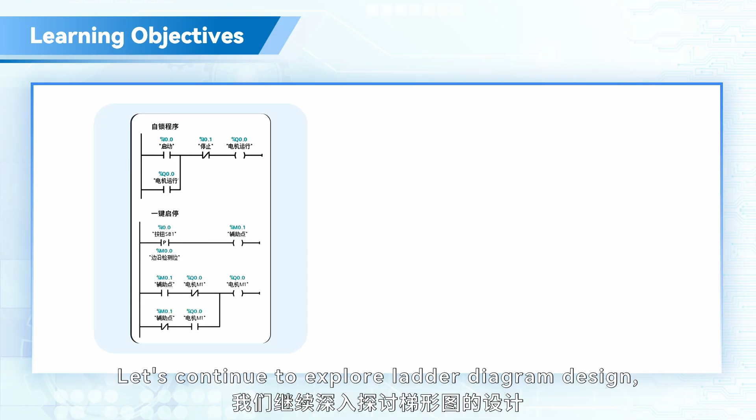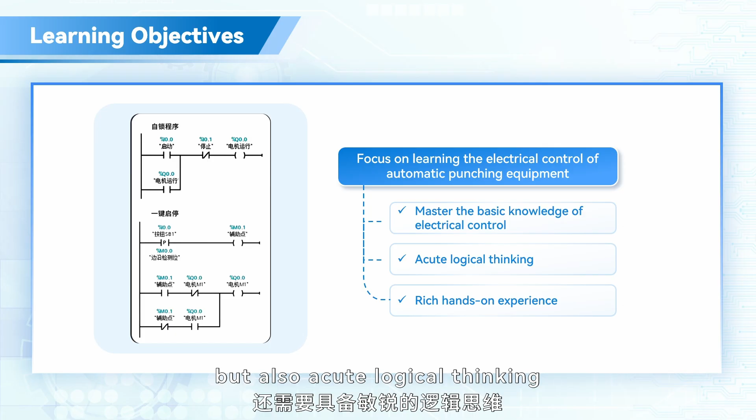Today we will study Chapter 3, PLC Program Controlled Punching on the Training Bench, Ladder Diagram Design, Part 2: Punching Process and Advanced Control. Let's continue to explore ladder diagram design, with a focus on the electrical control of automatic punching equipment. This is a highly practical and innovative task that requires not only a solid foundation in electrical control principles, but also acute logical thinking and rich hands-on experience. We will explore this topic from the following parts.

1. Initial setup and motion commands. Let's begin with Program Segment 14. When M5.0 equals 1, timer T37 is triggered with a 2-second delay. This provides essential preparation time for the subsequent actions. Next is Program Segment 15, which handles positioning for multiple punching points. When position flags such as M5.1, first hole, and M5.3, second hole, are set to 1, the main subprogram executes motion commands to move the punching mechanism to the corresponding positions. After the movement is completed, timer T38 is triggered with a 0.5-second delay to ensure mechanical stability.

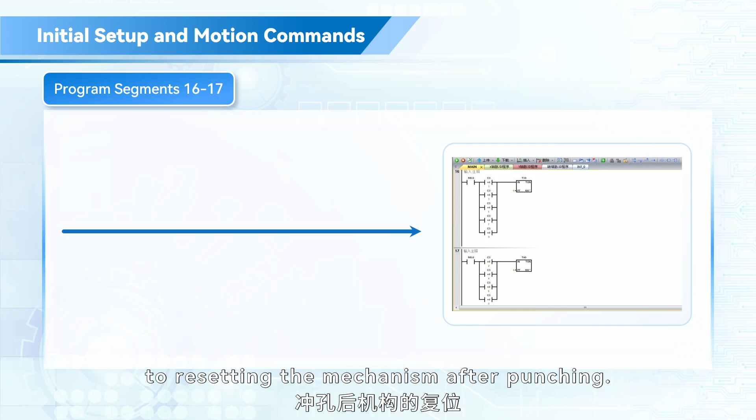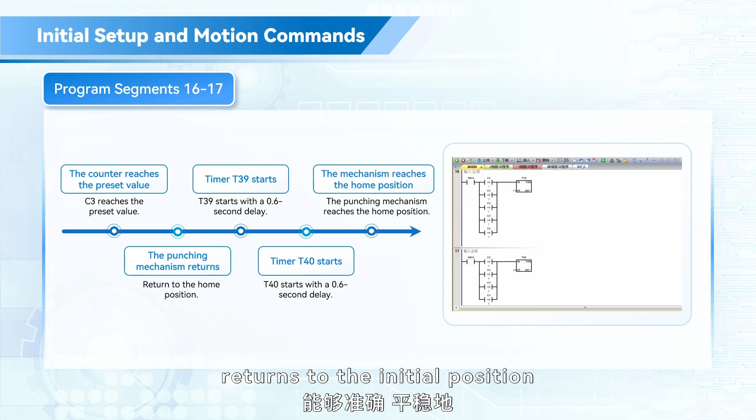In program segments 16 to 17, the focus shifts to resetting the mechanism after punching. When counter C3 reaches its preset value, the punching mechanism returns to the highest point, i.e., the home position of the AC motor. Here, timers T39 and T40 are used with a 0.6-second delay, respectively, to ensure the mechanism returns to the initial position accurately and smoothly.

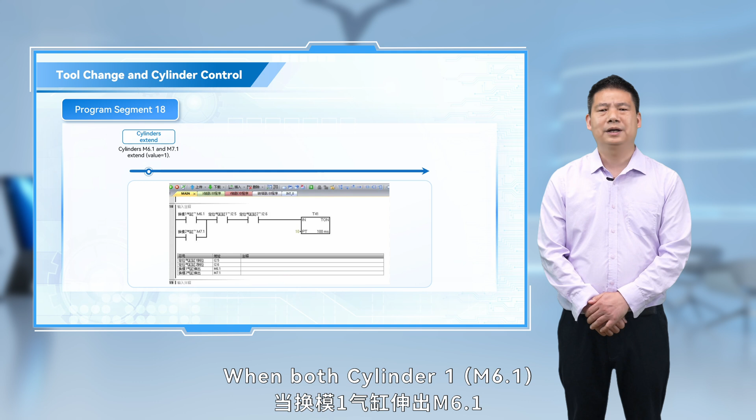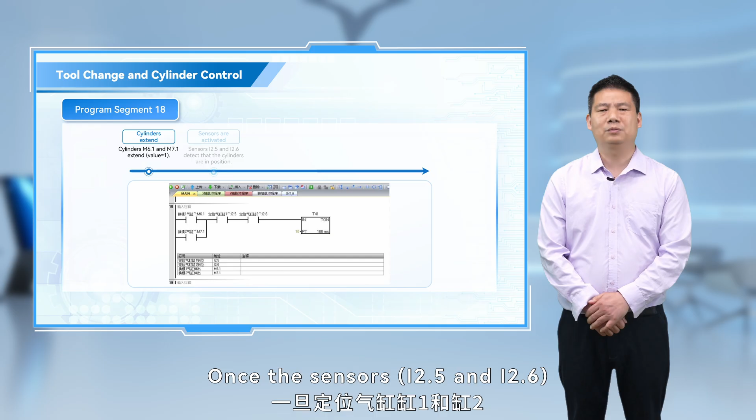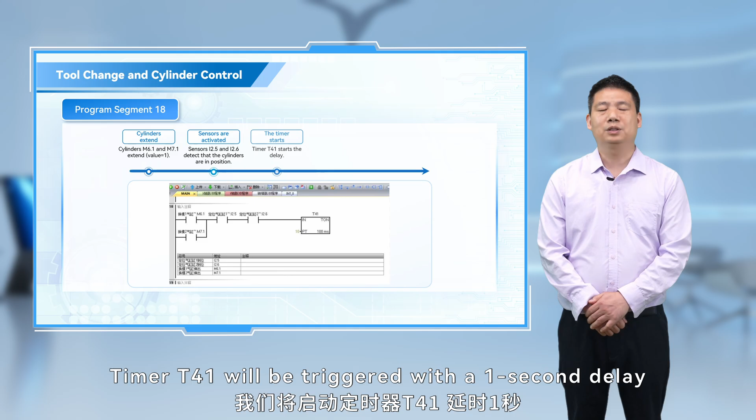2. Tool change and cylinder control. Program segment 18 focuses on the tool change operation. When both cylinder 1, M6.1, and cylinder 2, M7.1, for tool change are set to 1, they extend accordingly. Once the sensors, I2.5 and I2.6, for positioning cylinders 1 and 2 detect that the cylinders are in position, timer T41 will be triggered with a 1-second delay to ensure the stability of the tool change process before continuing punching.

Program segment 19 centers on the control logic of the cylinder solenoid valves. When M5.0 equals 1, indicating the start of automatic punching, the tool change cylinders extend to position. At this time, the solenoid valve Q1.4 is energized, opening the air circuit and driving the cylinders to extend, thus securing the tool holder. When the tool change cylinders retract and the punching is complete, the solenoid valve Q1.4 is de-energized, closing the air circuit, retracting the cylinders, and unlocking the tool holder.

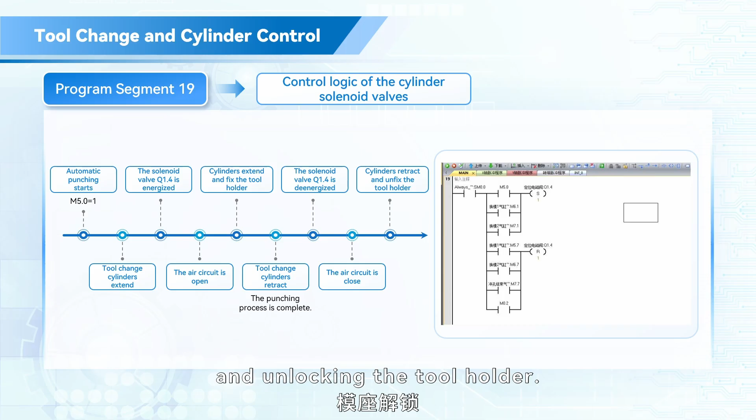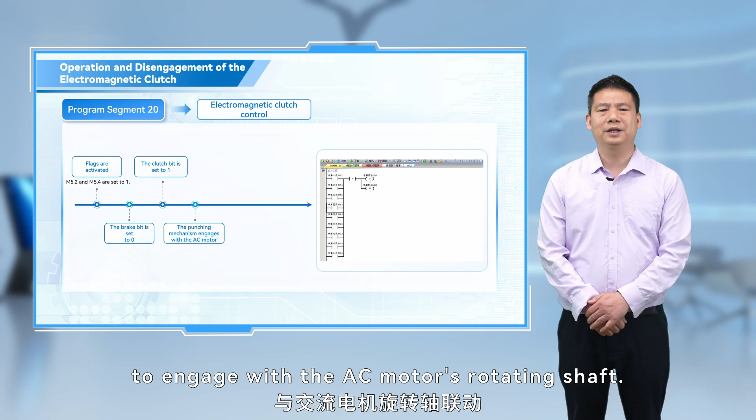3. Operation and disengagement of the electromagnetic clutch. In program segment 20, we control the operation of the electromagnetic clutch. When flags for punching the first hole, M5.2, and punching the second hole, M5.4, are set to 1, the brake is set to 0 and the clutch is set to 1, thereby enabling the punching mechanism to engage with the AC motor's rotating shaft. Each time a punching command is received, the two engage once. A total of 9 engagements are needed to complete the punching of 9 holes.

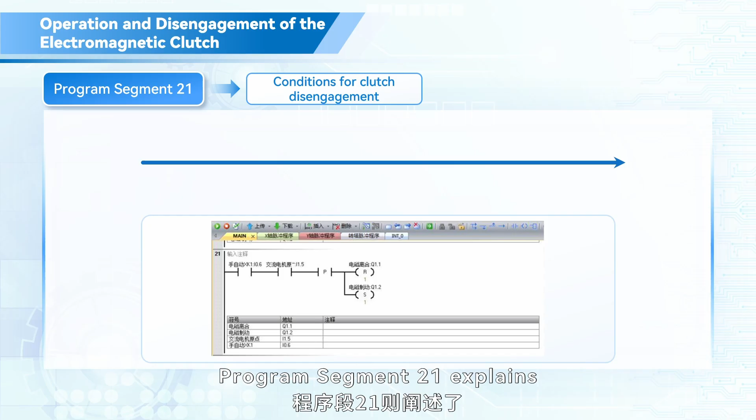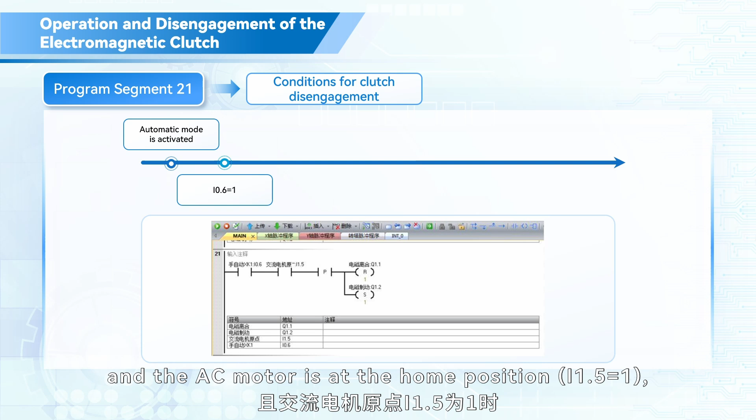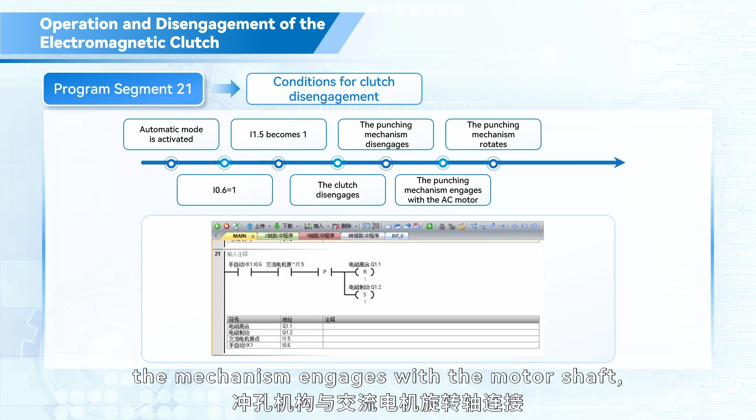Program segment 21 explains the conditions for clutch disengagement. In automatic mode, when I0.6 equals 1 and the AC motor is at the home position, I1.5 equals 1, the clutch disengages, separating the punching mechanism from the motor shaft. As explained in program segments 20 to 21, since the motor's home position corresponds to the topmost position of the punching mechanism, each time a punching operation is performed, the mechanism engages with the motor shaft, but once it rotates to the top and reaches the home position, it automatically disengages, halting the punching mechanism. Throughout the entire punching process, 9 engagements and disengagements occur.

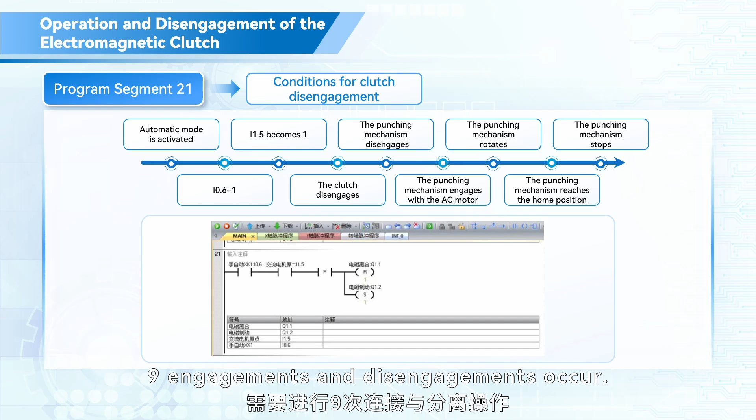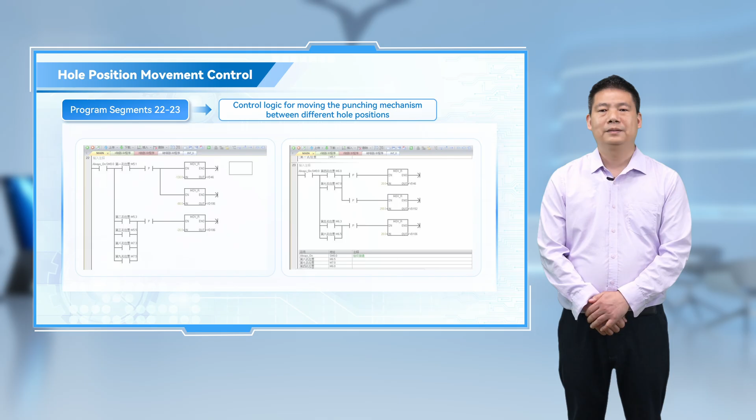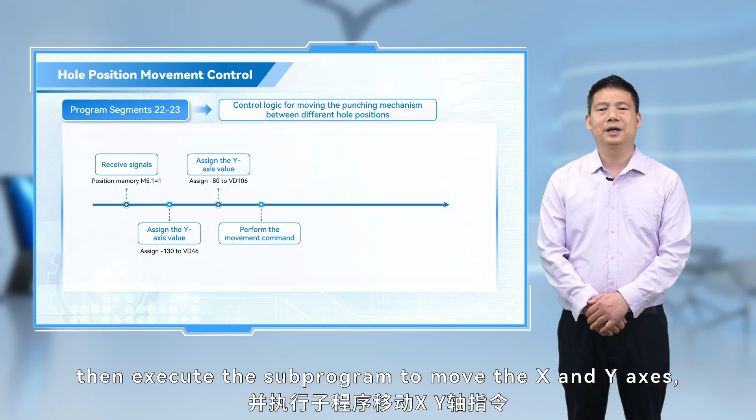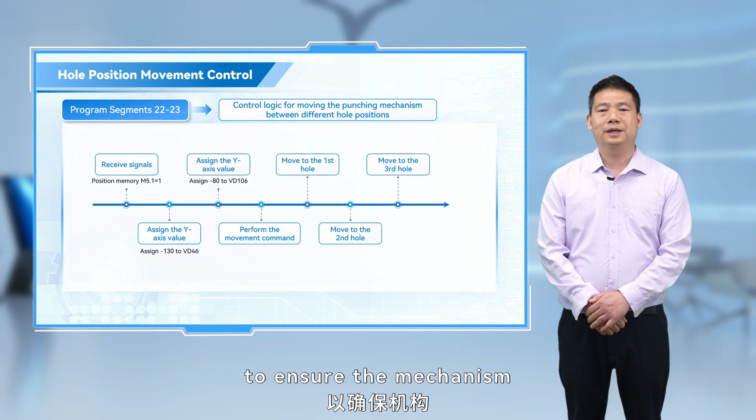4. Hole position movement control. Program segments 22 to 23 provide a detailed description of the control logic for moving the punching mechanism between different hole positions. For example, when the memory bit for the first hole position, M5.1, is set to 1, we assign -130 to VD46, x-axis, and -80 to VD106, y-axis. Then execute the subprogram to move the x and y-axis, guiding the mechanism from the home position to the first hole position. Similarly, for the second, third, and subsequent holes, corresponding values are assigned and movement commands are executed to ensure the mechanism accurately reaches each hole position.

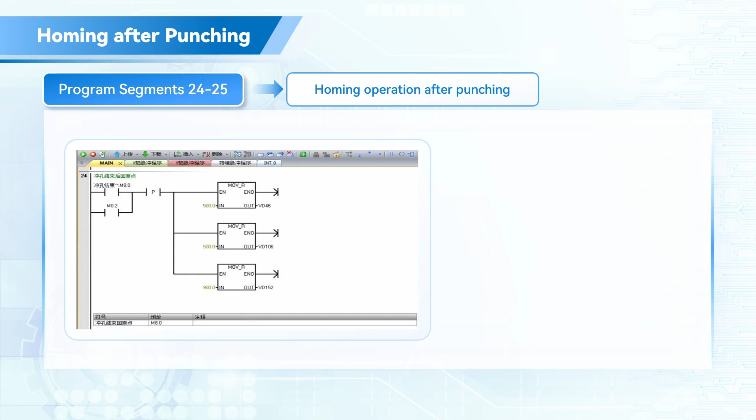5. Homing after punching. Program segments 24 to 25 focus on the operation of returning to the home position after punching is complete. When either the flag for homing after punching, M8.0, or the reset flag M0.2 is set to 1, we assign 500 to the x-axis and y-axis, and 900 to the turret, then execute the subprogram to move the x, y, and z-axis, guiding the mechanism back to the home position. In program segment 25, the trigger conditions, sensor-linked flags, and completion conditions are described in detail to ensure accuracy and safety during the homing process.

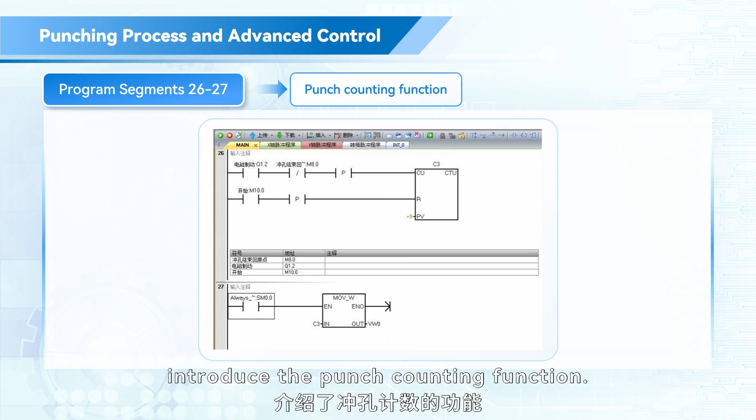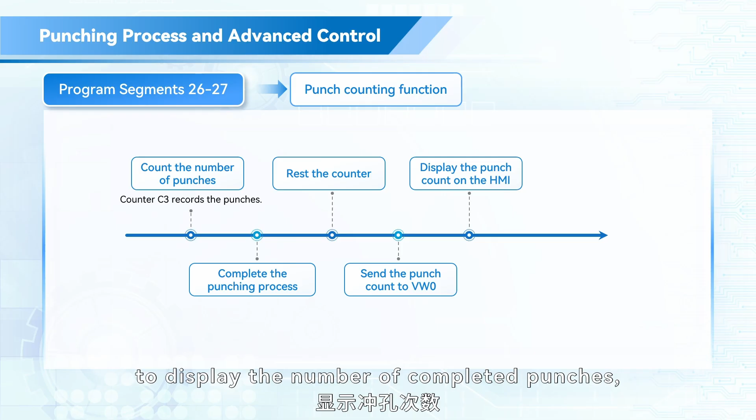6. Punch counting and display. Finally, program segments 26 to 27 introduce the punch counting function. Using counter C3, the system tracks the number of punching operations, and the counter is reset at the end of the punching process. In program segment 27, the counting result is transferred to VW0, allowing the HMI to display the number of completed punches, enabling operators to monitor punching progress in real time.

7. Summary. In this lesson, we have learned the design method of ladder diagrams for the electrical control of automatic punching equipment. From the initial setup to homing after punching, from tool changing operations to cylinder control, and from the operation of the electromagnetic clutch to punch counting. Each program segment is closely interconnected, together forming a complete automatic punching control system. Lastly, please complete the exercises after class.